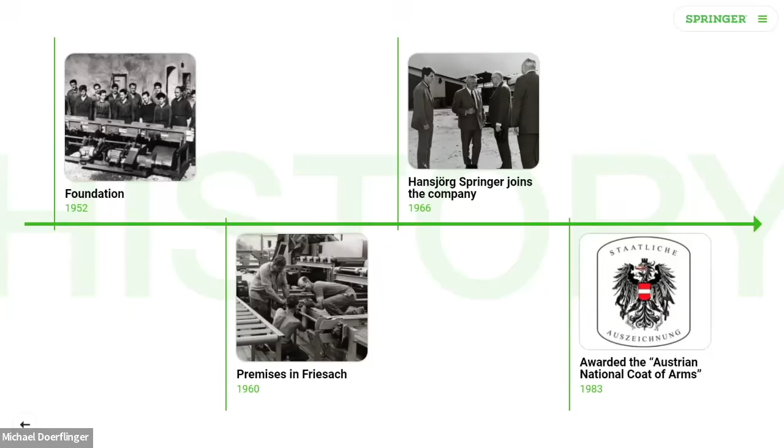So maybe a little bit about the history of Springer. The company was founded in 1952. Today, it's actively managed by the third generation of the Springer family, Gero and Timo Springer. Springer continues to evolve in the wood processing industry with innovative solutions. Springer entered the North American market in 2014 with a warehouse located in South Carolina and the sales and service office in British Columbia. Maybe, Sean, you can talk a little bit about the locations we have.

So the locations: Springer headquarters and primary manufacturing is located in Friesach in the southern part of Austria. The controls division is located in Linz and a satellite office in Klagenfurt. Springer is committed to developing their employees by offering internal apprenticeship programs in 7 different vocations. Students starting in grade 8 follow through to high school and into first-year university. Springer solutions have circled the globe and have been delivered to 6 continents with more than 30 installations in North America.

A few words on why customers have chosen Springer. Springer focuses on high quality and reliability. And it's very important for us to provide customized solutions to our customers. Our innovations help our customers to maximize productivity and performance. Our commitment to deliver the right solution for our customers includes research and development, engineering, installation, and continuous service. Springer's planet-friendly mindset guides us in utilizing energy-efficient and environmentally responsible solutions.

Springer's capacity begins with the 40-acre site in Friesach, including engineering facilities, manufacturing and machining, a paint shop, a warehouse and storage, as well as final packaging and logistics. Nearby, a second facility houses our service department and equipment testing.

Let's move on to the solutions and to the Springer portfolio. As you can see here on the screen, Springer provides equipment for log handling. On the very left side on the screen, you can see conveyors. We provide equipment for lumber handling. We provide equipment for automatic wrapping systems, wrapping lumber packages, as well as controls for the systems, including robotic automations.

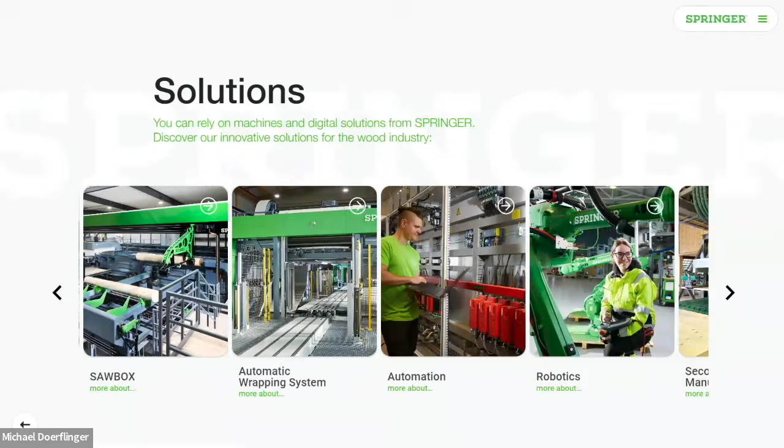Michael, I'm going to begin with talking about screws. The screw technology debuted in North America in 2016. It is widely recognized by the industry as being first developed by Springer, providing full electric control and efficient movement of logs. The screw unscrambles, aligns, and conveys logs with minimal energy consumption and maximum control and productivity.

The sequencing and conveying is done seamlessly with minimal fiber damage and equipment wear. The screw feeders initiate log movement in the direction of the receiving conveyor, minimizing gap and log impact. I was the mill manager for Coastland in 2017 when we installed the Springer merchandising line, and the screw technology was a determining factor. Thank you, Sean. In addition, one point worth mentioning, we installed about 60 units now in North America. 60 units. All right.

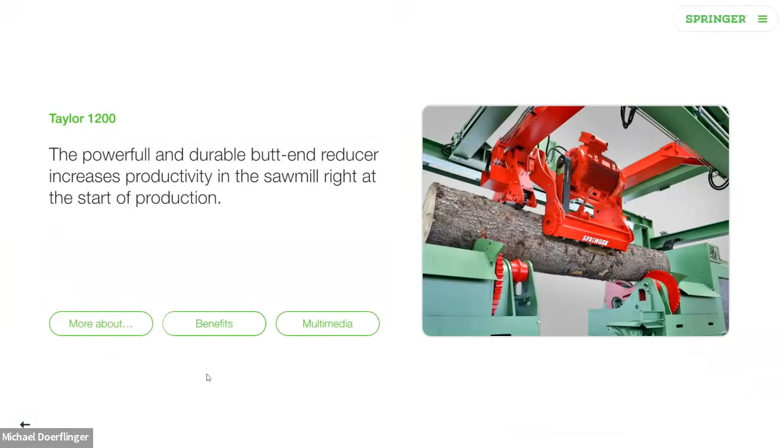The next component we would like to talk about is our Taylor 1200. It's a flare reducer. Springer provides flare reducers with a single and a dual head design. The cycle time for the reduction of the flare, and this is quite amazing, is 5 seconds. And the whole process can be done inline or offline on a bypass section to maximize production and the log flow. Springer's experience using the flare reducer provides a seamless flow downstream.

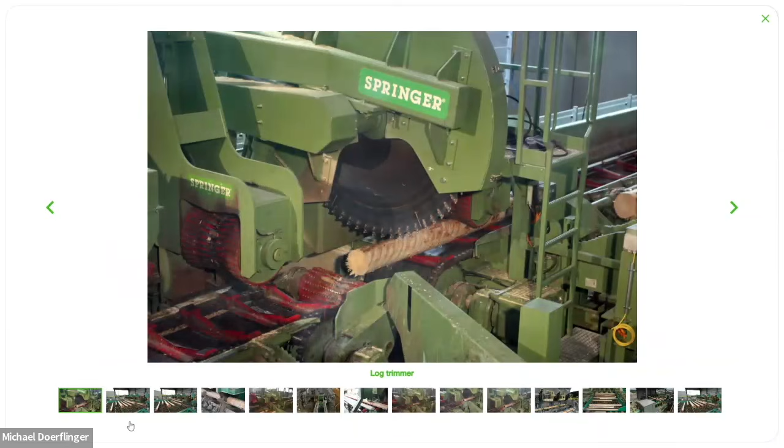Let's talk a little bit about the bucking. Springer offers different kinds of solutions for cutting stems, 2 solutions, in fact. We provide, as you can see here on the screen, the stationary system on the longitudinal section, or, as you can see now on the screen, a bucking unit with shifting saws on the transverse sections. Maybe, Sean, you can talk a little bit more about the entire merchandisers.

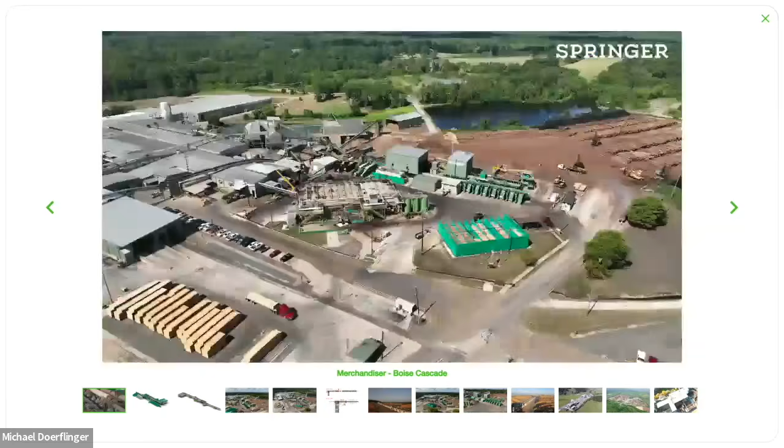Yeah. So the entire merchandiser lines would include log in-feed sections, debarking, scanning, optimized bucking solutions, trimming, and multi-bin sorting. The whole system is designed, engineered, manufactured, installed, and commissioned by Springer. Michael, how many bins maximum has Springer installed on a sort operation? We have like 200 bins. So 200 bins, amazing.

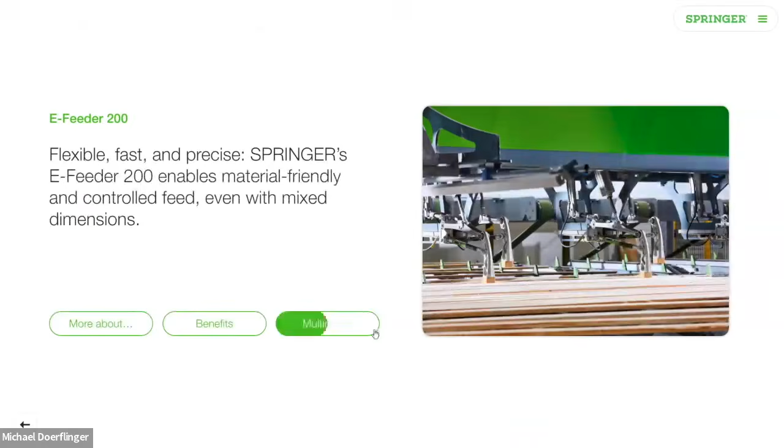So let's switch to the lumber section. I get to talk about this one. Yes. The E-feeder. This is everyone's favorite to watch. The E-feeder singulates multi-dimensional lumber to lug chain, feeding the grading lines, including timber dimensions up to 6 by 6. For processing timber, 2 arms in tandem are used to handle the heavier material for the larger 6x6. The E-feeder has been named the Crazy Horse and has proven to be a very reliable, material-friendly, and remarkably low-maintenance unit. It can be positioned or exchanged in existing lumber grading lines.

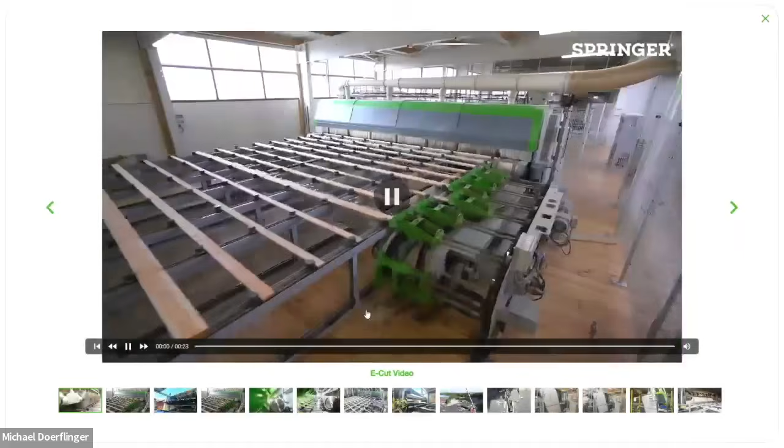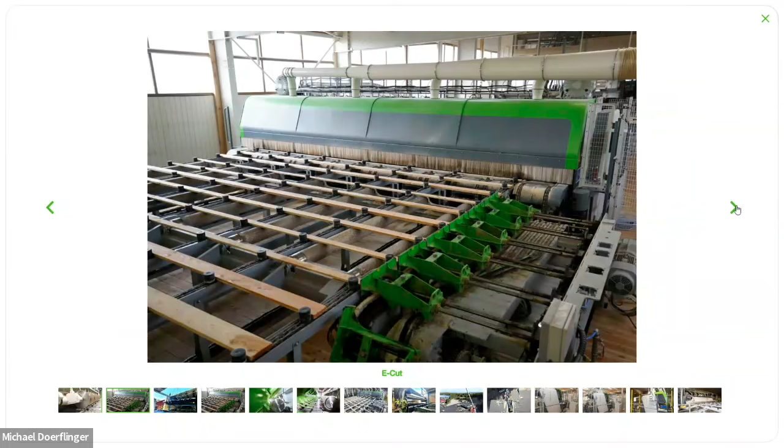Thank you. Another component we are very proud of, we call it the E-cut. E stands for electric, so we are not using any hydraulics or pneumatics on this unit. This unit is used for grading lines, just before the sorter. Springer's beltless trimmer precisely cuts up to 200 boards per minute with low power consumption. It works regardless of temperature and is a low cost and trouble-free machine due to the controlled movement of boards and trim ends. Again, this unit can be positioned or exchanged in existing lumber grading lines.

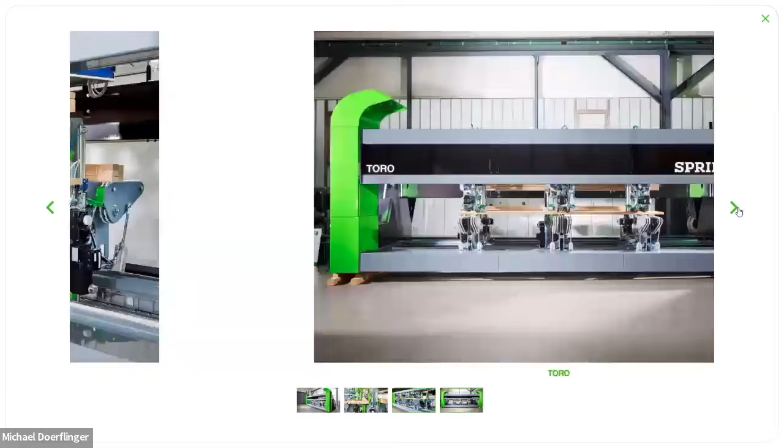And now we'll move into the Toro. The Toro is one of Springer's unique lumber bundling solutions, capable of bundling 15 packages per minute. It handles a wide range of dimensions and offers adaptable strapping positions. It was originally designed for small finished lumber bundles delivered to home centers for merchandising to retail customers. The machine is operator controlled to customize bundle sizes at will. The Toro is an example of Springer listening to its customers' needs and building an elegant and practical solution. The Toro can be positioned into existing stacking lines and can be toggled on and off. Springer also offers entire grading lines.

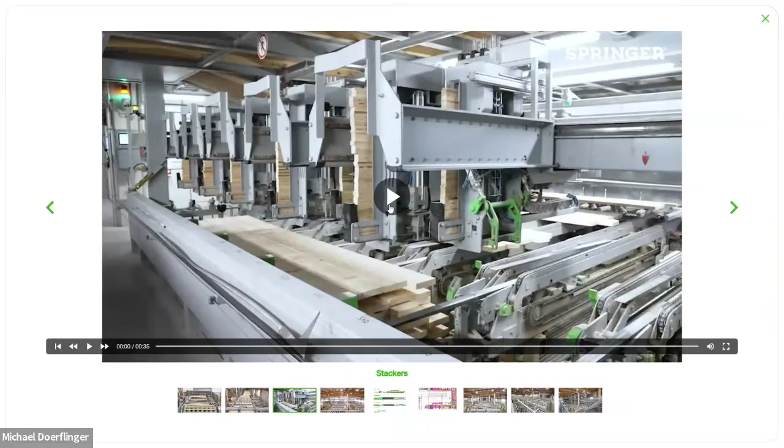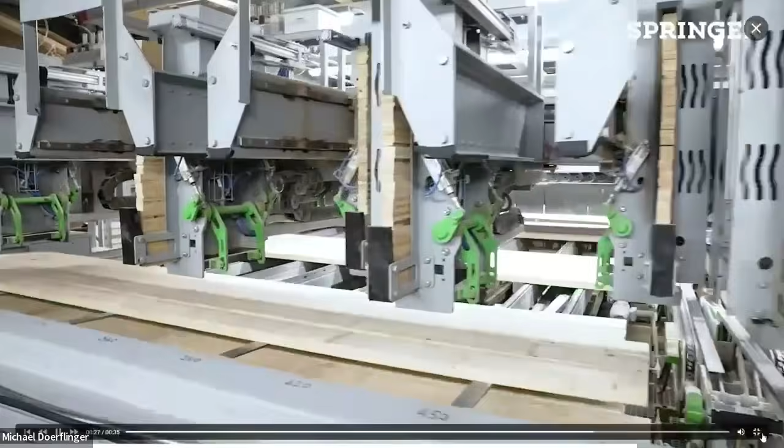Now we would like to show you a short video of a Springer high-speed stacking solution on the dry end. For this, we are using a double fork system with semi-automatic, movable lath or stick dispensers. This system is able to stack up to 28 layers or tiers per minute, so it's a high-speed solution. That is remarkable. Oh, yeah. Let's continue on the lumber handling side. That's going to be the last unit we are talking about for lumber handling.

It's the wrapper ED3000, we call it, and we are very proud of this unit. We have been installing this one a few times now, also in North America. The ED3000 wrapper's innovative concept enables efficient and automatic wrapping of finished lumber packages. And the benefits are outstanding.

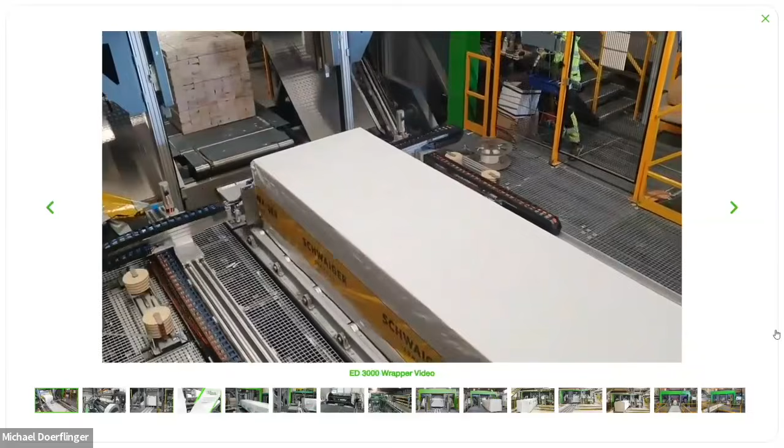A fully automatic film magazine dispenses for 6 rows on top of the machine. It's continuous production, not interrupted by the wrapping process. The unit creates a bag, custom adapted to the package sizes. Another benefit is both welding and sewing heads are available depending on film type. So we are using a sewing head for woven material and a welding head for polyethylene material.

Maintenance on this unit is very minimal. The whole system can be fit easily into existing wrapping lines due to its small and short footprint. And as an add-on, as you can see now on the screen, we also provide a stapler unit to secure the bags to the lumber stack without strapping.

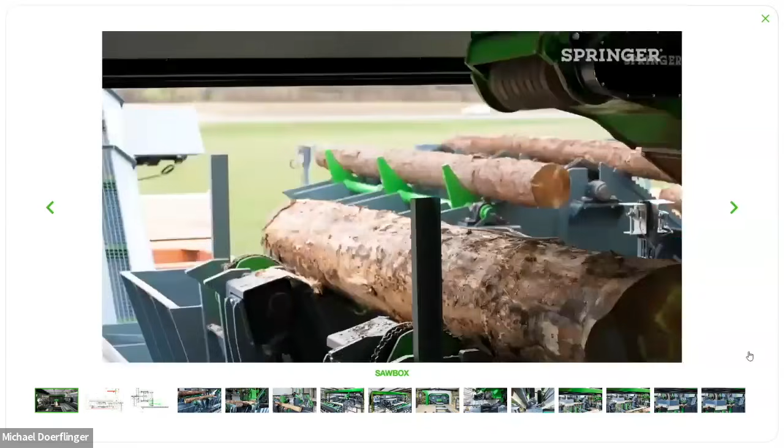All right, Michael. We're going to move into the feature product of today, and we're going to talk about the Sawbox. The Sawbox offers the possibility of operating compact sawmills with a very high degree of automation. The system debarks, reduces, measures, chips, and separates round timber. The resulting sawn timber is scanned, pre-sorted, and stacked using a semi-automatic stick laying system.

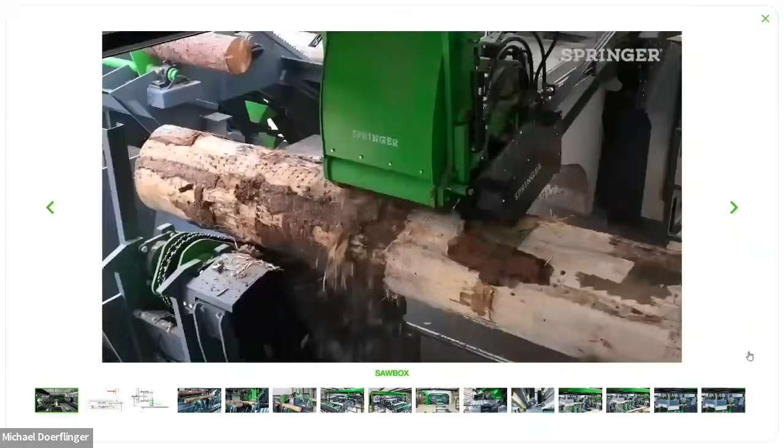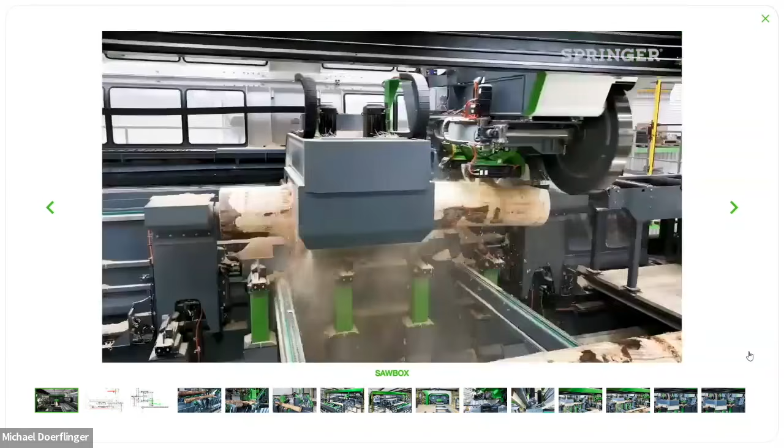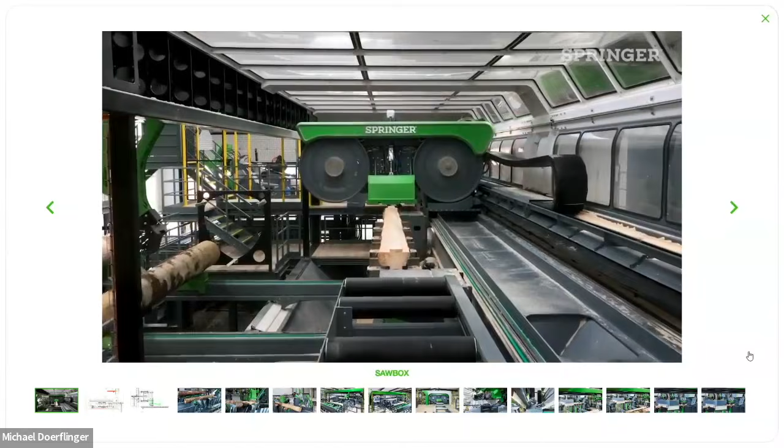The system offers small timber companies the opportunity to supply themselves with sawn timber, reducing the dependence on other suppliers. Within the last 2 years, Springer has designed, manufactured, and trialed the Sawbox in-house. After a test period of 2 months, we have now relocated the machine to our customer, Cimenti. Michael, do you want to discuss some of the benefits of the Sawbox?

Quite a few benefits. We would like to mention benefit number 1. It's the footprint. With the footprint ranging from 1,000 square meters to a maximum of 1,500 square meters, that's about 11,000 square feet to 16,000 square feet, the Sawbox enables optimal use of company premises. Another benefit is companies can cut their own round timber, thereby optimizing their production costs and not depending on their suppliers.

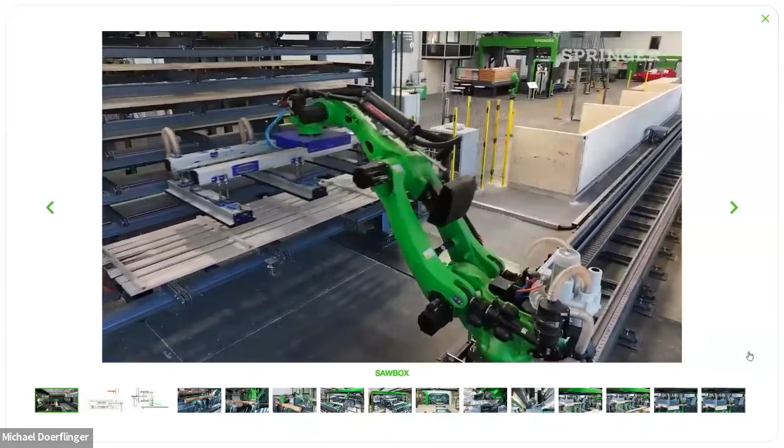Another benefit, the investment costs for setting up the Sawbox are only a fraction of those for conventional sawing technology. Investing in your own sawmill is affordable again. The use of local wood, and this is another benefit, and the recycling of all wood waste support the local economy and contribute to sustainability. In-house production enables stable product prices in the long term.

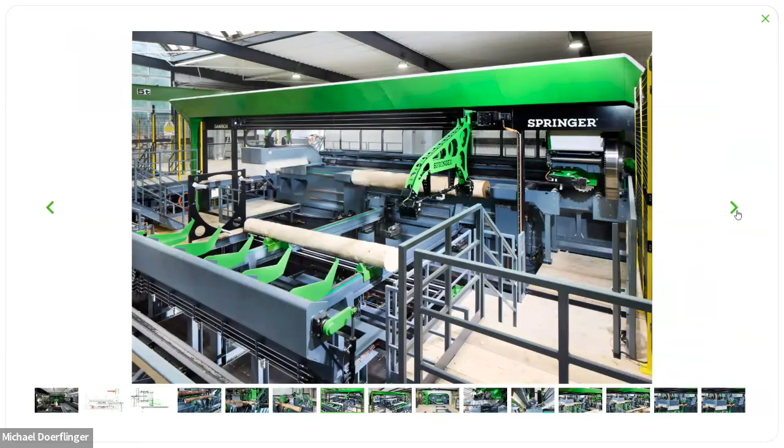The cutting capacity, we are calculating with roundwood coming in of 15,000 cubic meters up to 30,000 cubic meters. So 15,000 would be on one shift, 30,000 on 2 shifts. In board feet, it is like 6.5 to 13 million board feet. The log diameters we can handle range from 10 inches up to 40 inches. So we can handle quite huge diameters with this machine. The lengths, we can handle 10 foot up to 20 foot.

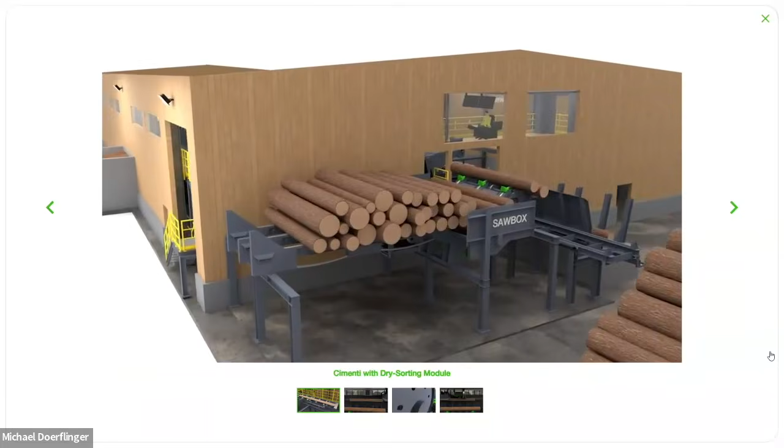All in all, the electricity consumption will be a maximum of 500 kilowatt hours. Right. John. Okay, Michael, thank you. Let's now look at the processes with a simulation video of the Cimenti site. So this is a computer-generated, complete modeling of the site. This video will give a complete overview of the equipment, as we will be showing you live in a moment.

So the material flow, right now you can see the in-feed, starts at the log in-feed. From there, a mobile shuttle transports the unsorted 2 to 6 meter long logs to a debarker, which also serves as a reducer in case you have flares on it. Next, that's what you see right now, is a cross-cut saw. It makes a clean cut on both ends of the logs.

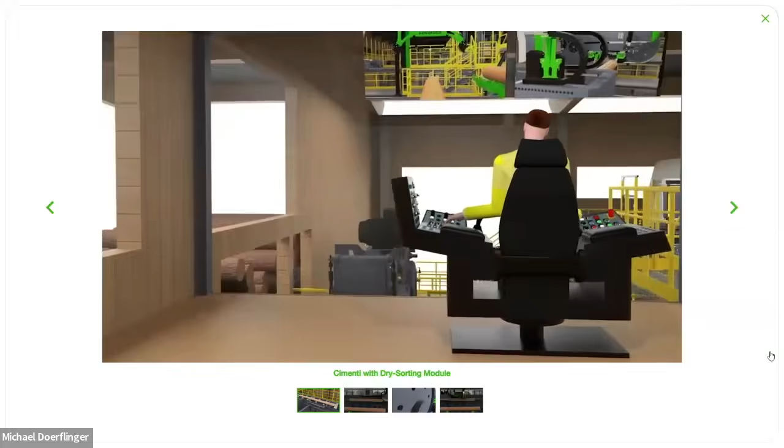After that, the logs are transferred to a cross conveyor and measured using a 3D log scanner. Based on the data obtained, the software generates the optimal cutting pattern. The actual cutting is carried out by a processing unit also developed by Springer.

So Michael, we're now watching the transfer, the shuttle, and beginning to see where the handoff takes place into the cross conveyor. You can see the log sitting in the loader arms, waiting for the conveyor to be ready, going to the measuring device.

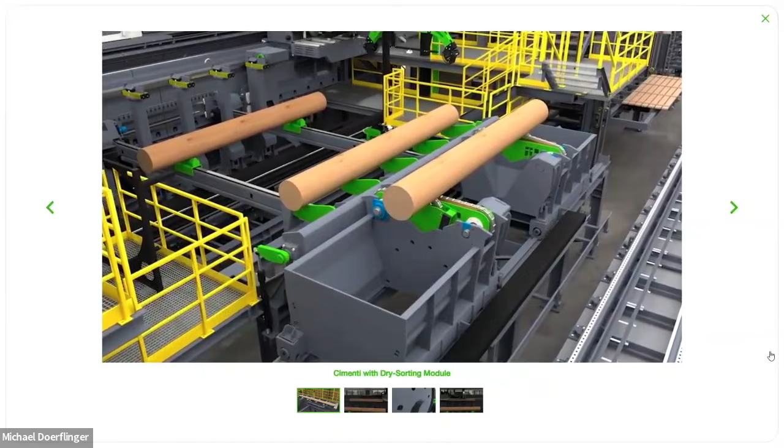Maybe a few words about the shuttle itself, and we are going to explain later on when we are there on site. You can notice the double chain, and it allows the block to be actually put into a reject bin should the operator determine that it needs to get ejected. Exactly. Those chains in the shuttle, they also help to rotate the log during the debarking process.

So you can see the pass off to the cross conveyor. The block is, again, like Michael said earlier, being scanned to determine the optimum cutting pattern. And again, we're going to show you the actual configuration here with some recorded video of blocks at the saw site.

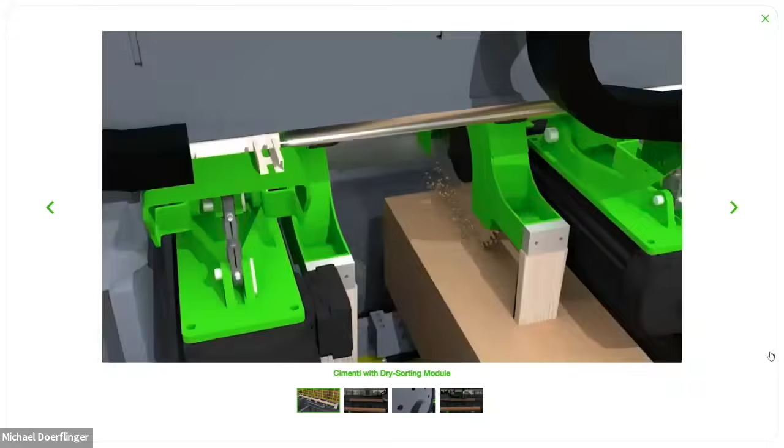So the processing head unit moves over the clamped logs and produces sharp-edged lumber in a single pass. The system is equipped with a profiling unit, 2 vertical circular saws for crosscuts, and a bandsaw. The finished lumber is pushed off longitudinally and transported to a sorting tower via a cross conveyor.

So you can see now the sawn lumber being pushed. And then roller conveyor. Yep, driven roller conveyor, and then it gets fed onto the cross conveyor, separating each board. They are now going to be positioned into the stacking system.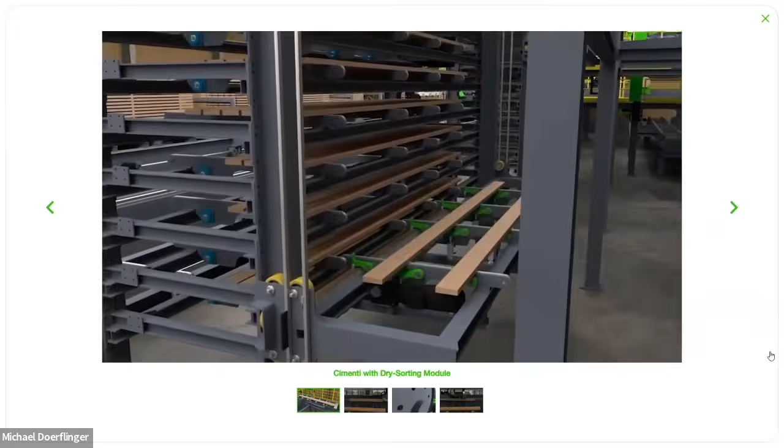The tray loader automatically loads by grade each of the levels. A robot then will unload using the tray and place it into the grade bin up and down the track. In Cimenti, they actually have both a green and a dry sorting line. That's right, yeah.

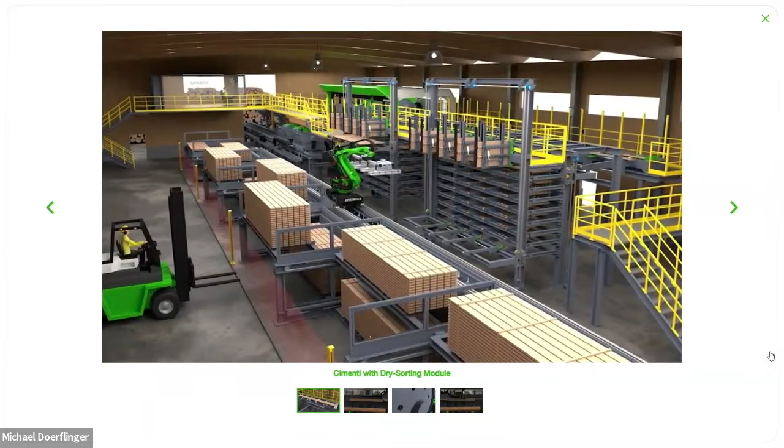Again, logs with diameters from 10 to 40 inches can be processed, so 25 centimeters to 1 meter. The Sawbox demonstrates its advantages, especially when it comes to larger diameters. The larger the diameter, the higher the output. The system installed at Cimenti is designed for logs with an average diameter of 35 centimeters, so this is about 14 inches, and an annual output of 15,000 cubic meters. So that will be about 6.5 million board feet.

The Sawbox concept is modular by design, with the lumber sorting being potentially shared by a secondary processing unit. Again, the Sawbox requires only, and this is the amazing fact, only 1,000 to 1,500 square meters of space, so much less than any conventional saw line. Okay, Michael.

Well, we're gonna change this to a little bit of live action so you can do a walkthrough. Yeah. And I'm gonna stay here with Jakob, and I will comment on the videos of the processes you're going to describe to us.

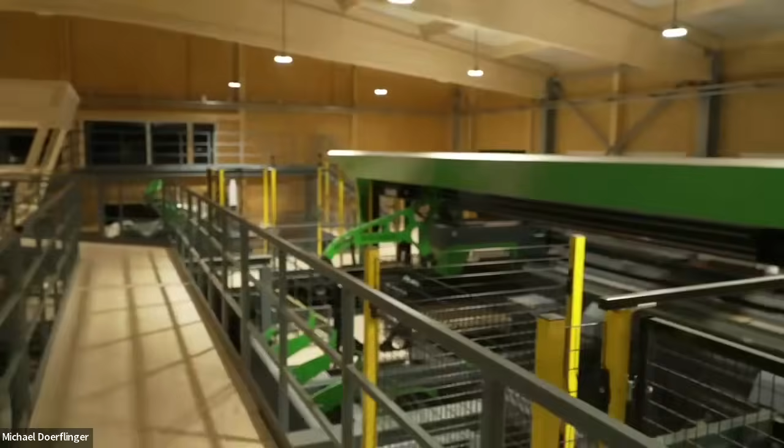So let's have a look at the feed section of the whole unit of the Sawbox. And maybe you can have a peek here at the back where you see the operator cabin. In this case, everything made out of CLT. This is the walkway going down actually to the Sawbox unit itself. You see it here on the left side. We will just have a walk around the Sawbox. The infeed system is right over there. Let's go.

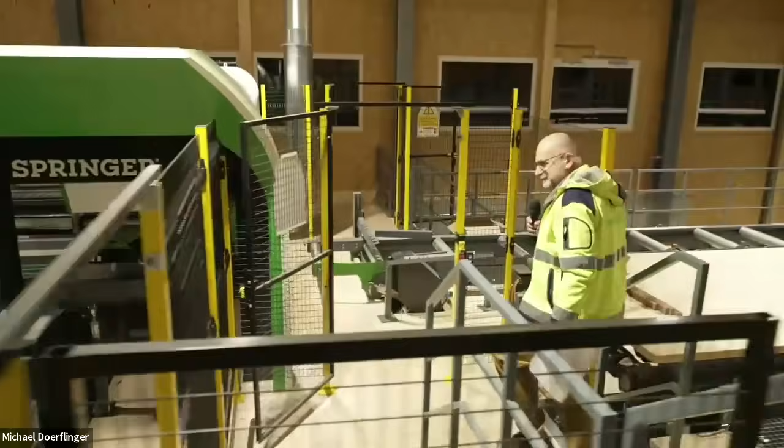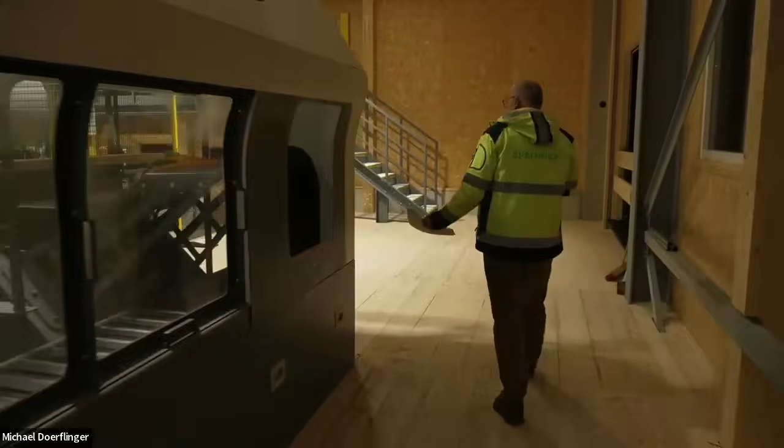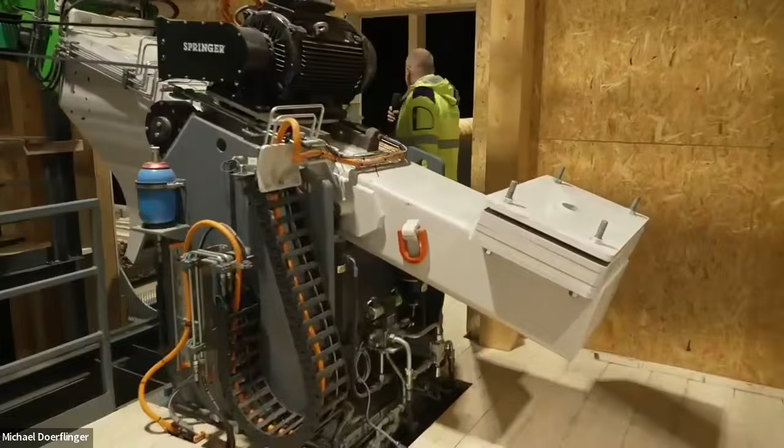This whole part is the back of the Sawbox. We are going around the Sawbox. Later on, we will come back here. And we are going down to the infeed section, passing the cutting device and the debarker. As you can see, it's already nighttime here in Austria.

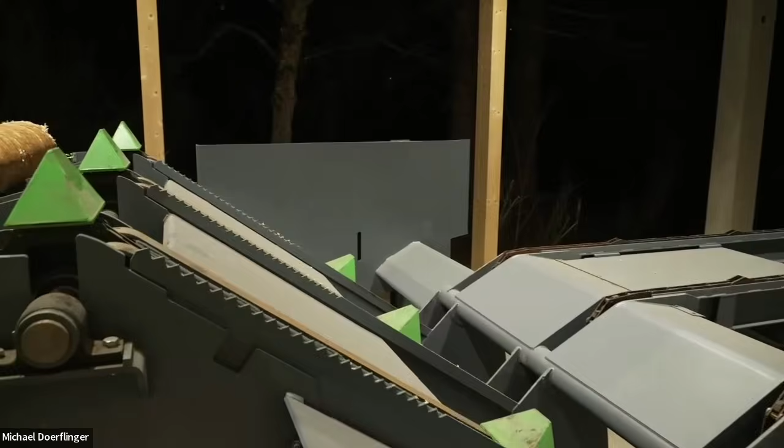Let's start here on the infeed conveyor. This conveyor is about 9 meters long. And in this case, it's for a log length from 3 to 5 meters, but we can anytime add chains for longer logs. Second unit is a simple jack ladder to unscramble the pile of logs. And here on my left is a stop end loader. And this stop end loader is feeding the logs into the shuttle.

What you also see here, right at the position of the stop end loader, is a measuring device. So it's a laser scanner. In this position of the stop end loader, we are already checking the length of the logs being transferred to the shuttle. This is necessary for the cutting later on. And then, Jakob, if you go ahead with the video, please show the video of the infeed section.

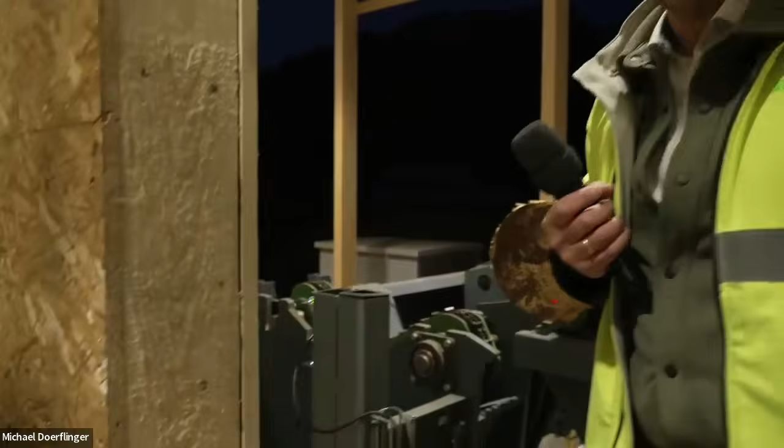Testing all of the equipment. You'll see the shuttle backing up to receive a log. Again, note on the infeed, this is from mixed wood. So albeit they look like they're similar sized, it can be a mixed diameter of logs.

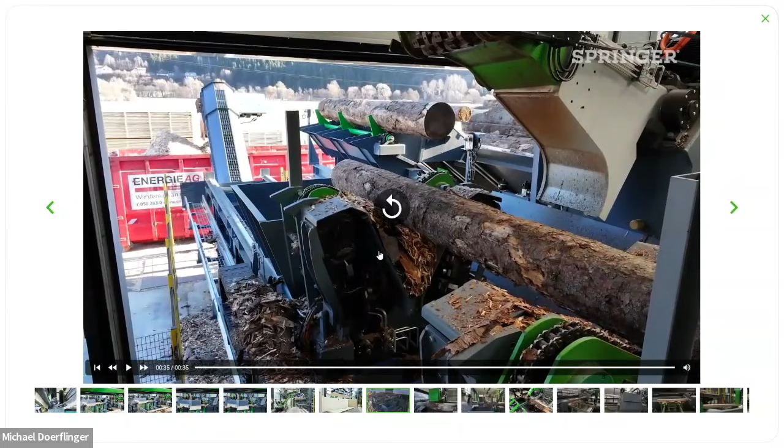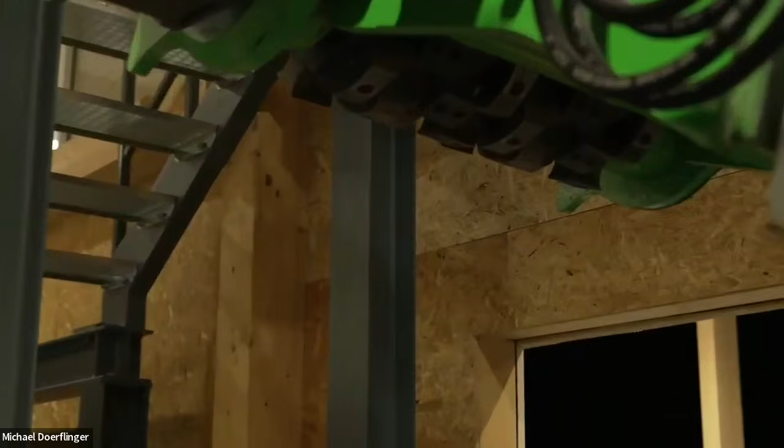Let's move on to the first unit after the infeed section. So right now I'm at the back of the debarker. At the back you can see the counterweight. In front we have a driven razor head. The length of this razor head is 24 inches. And again, you can use this unit for debarking the logs, or if there is a flare end detected, you can also use it as a flare end reducer, which is quite necessary for the process later on.

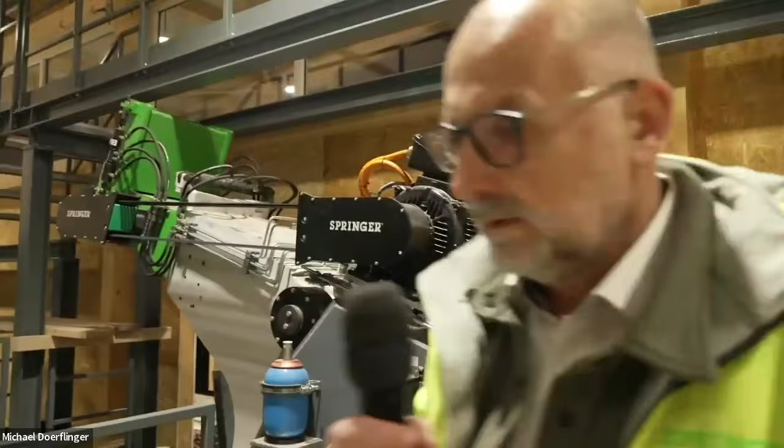On the left side of the debarker, you can see our cutting device. This is a unit for cutting precise length of the logs. So overlengths will be handled here. Please go ahead with the video.

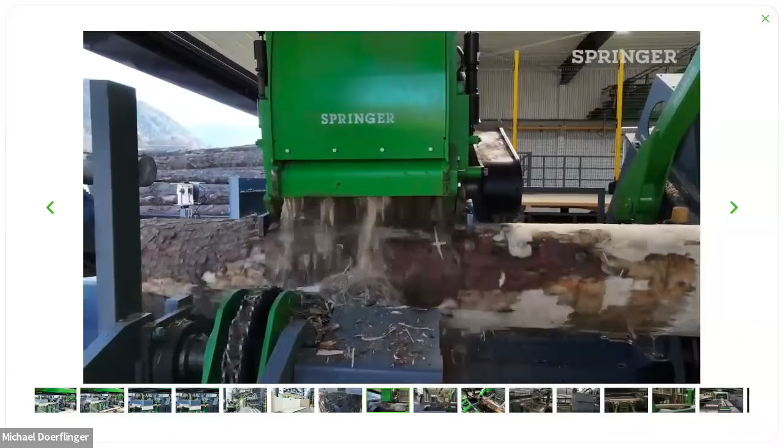As Michael described, the debarker removes bark that gets deposited into the waste conveyor below. This is just pressure fed with the razor head. The razor head is 24 inches in width, and it takes only minutes. Again, the operator can override should they see that the flare needs to be reduced, and it's under their control. The block advances, so both the leading edge and the trailing edge of the block are trimmed for cleanup and length.

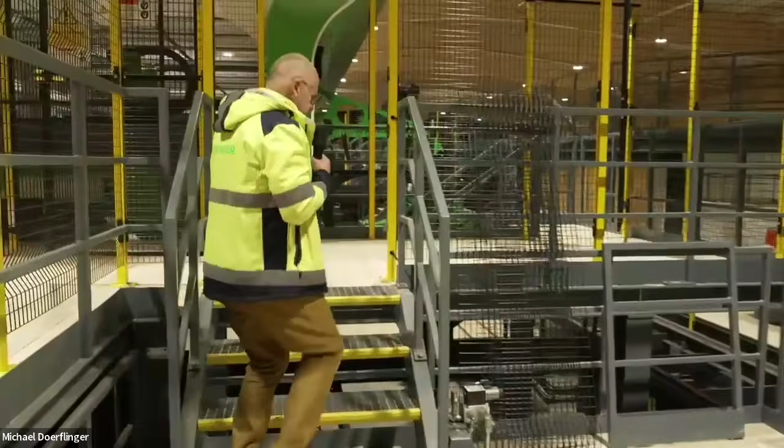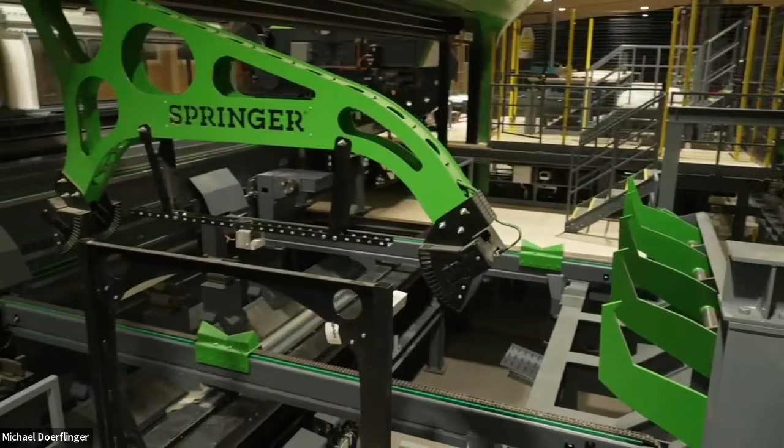So from here, we walk straight up to the infeed section, going to the Sawbox. So this is the rail from the infeed up to the transverse area where the logs are being transferred into the conveyor, leading to the scanning. We have included a scanning device with two scanner heads on top and one scanner head at the bottom. And maybe you can run the video, please, of this section.

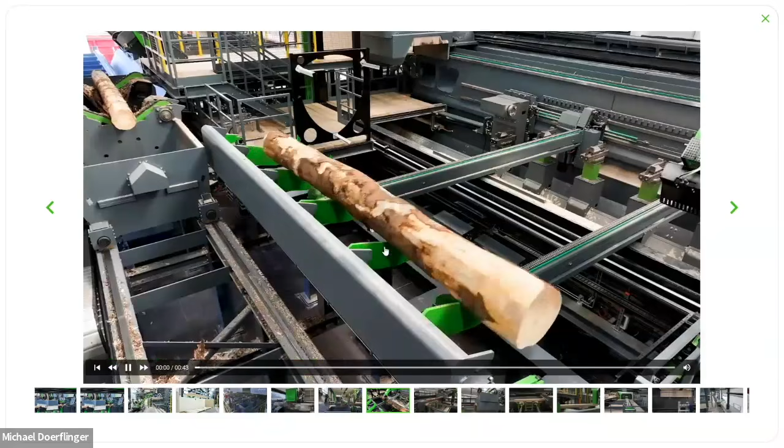So you're seeing the log passed off to the cross conveyor, being positioned for the 3D scan. The cross conveyor chains do an X alignment when it gets passed off to the spindles. The spindles themselves, from a height variation, will make that adjustment for the Y direction. So again, the scanning process is relatively quick. And you can see in the video that another block just got dropped off by the shuttle.

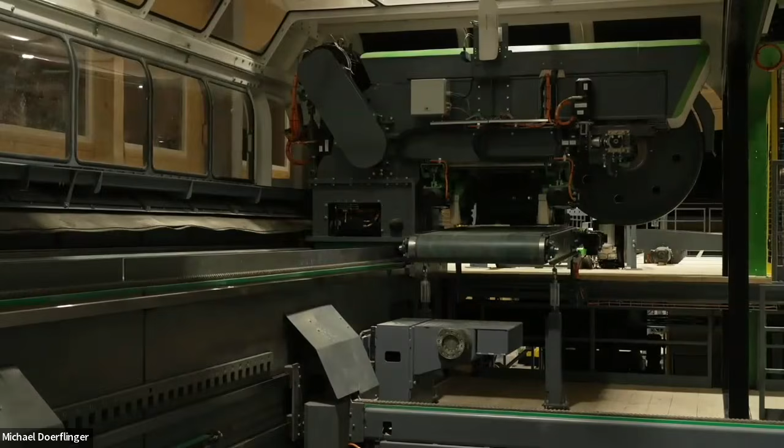Okay, from this area of the scanning, we go straight into the area where we do the cutting itself. You see on your screen now all the waste handling underneath. So there's a belt conveyor, actually two belt conveyors. And you also see those spindles, one on the left, one on the far end. They are going to hold the logs, they're going to clamp the log.

But first, actually, I would like to show you what is underneath this cabinet here. This cabinet contains the chipper heads. And those chipper heads are making the clean face on top of the cant and also the profile of the logs. But I think, Christian, we go with the camera straight back to the backside of the Sawbox, to the other side of the area where we have the bandsaw itself and the rib saws.

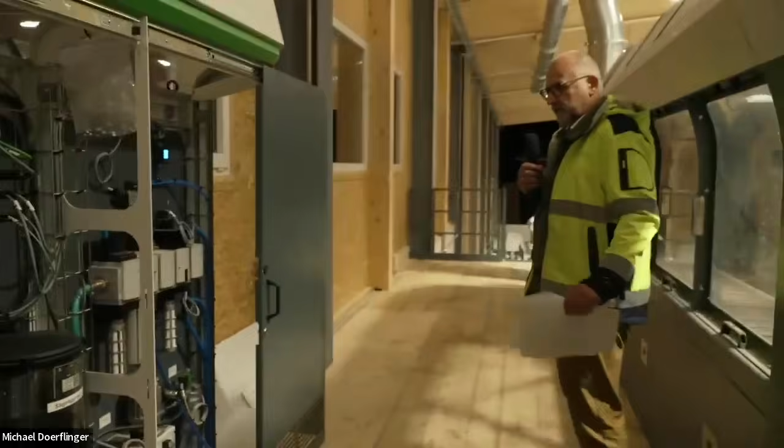Maybe a quick glimpse to this area here. We have installed the grease system, so the whole system is equipped with the automatic grease system. Also, the pneumatic control system is located here at the back of the Sawbox. Let's continue on to the other side of the Sawbox, where the bandsaw and the rib saw carriage is mounted.

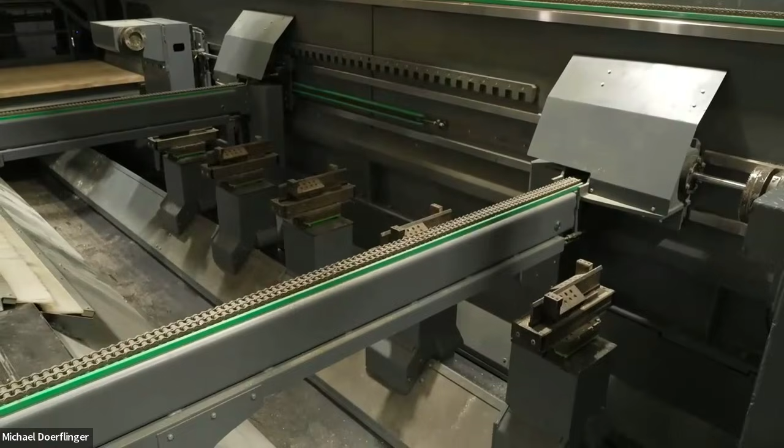Again, we need to go down here. So we are just on the opposite side now. Over there is the carriage with the chipper heads. In the middle, you see the spindles. They are clamping the log. Just down there, you see 5 arms. They are all separately movable and adjustable, with a clamping device on top of those 5 supporting arms.

What you see here is the area where we are still going to install. Again, we are not finished with the installation. We are going to install the bandsaw itself here in this area on these drums.

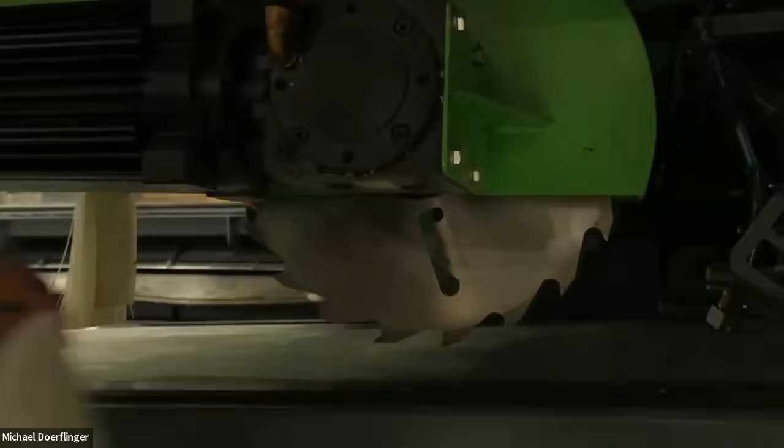In the middle, you see the rip saws. They are adjustable. We have a couple of them, so 2 of them. And the measuring is done also here on this device, on the carriage where we have mounted the rip saw and the bandsaw. The measuring is up here.

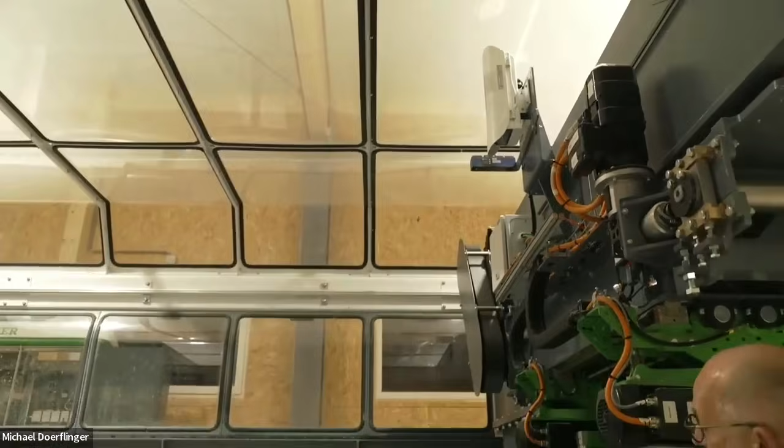You see a camera up there and the laser scanner. So with this camera, we are checking the quality of the logs. And with the laser head, we are checking the dimension. Let's go for the video.

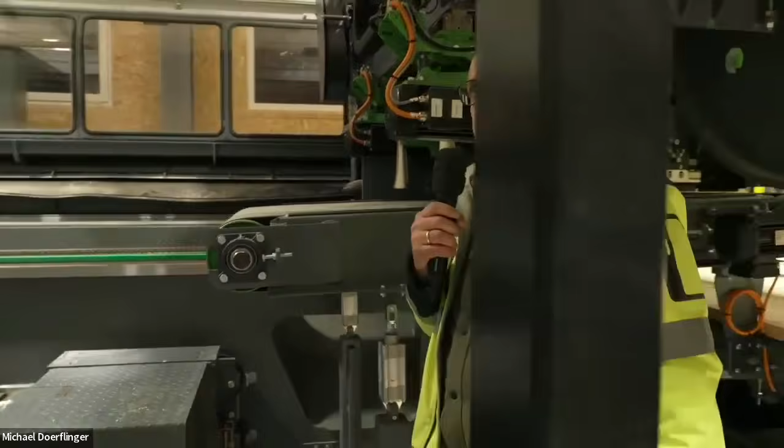In this video, the scanned log has been centered and is being picked up by the block spindles. It's going to do a rotation for the optimal cutting pattern. These supports from below come up, and the chipper carriage now profiles the top. So it does a single pass, cleans the top off. On its return, it will bring the bandsaw, in addition to chipping and profiling the first board.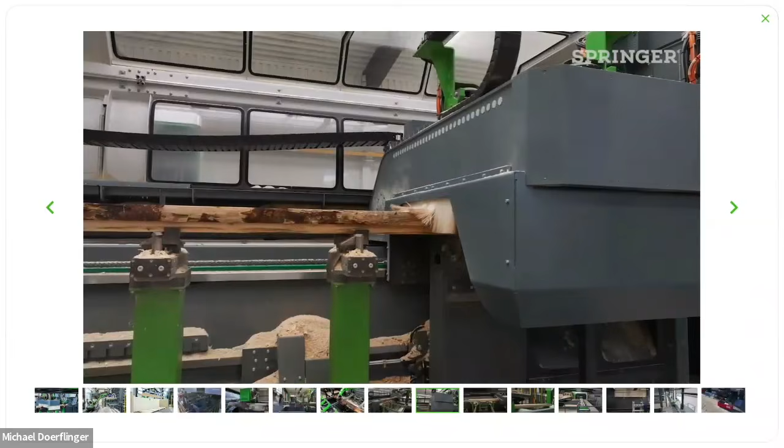The block will be turned. And the support pieces from below will clamp the board, which allows the spindles to then fall out of the line of the bandsaw. You will see this video now where we're nearing the end of the sawing of the block. The bandsaw is now pushing the timber off.

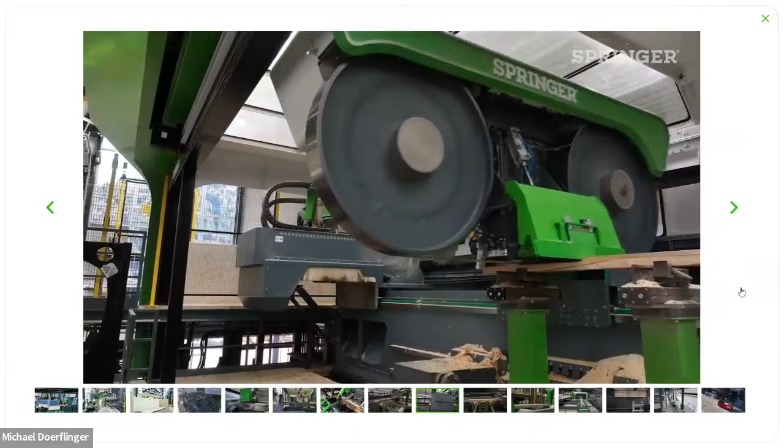The remaining section is profiled and will be cut again by the bandsaw. The remaining clamped portion, the minimum, is 1 inch. However, the sawn timbers can be as small as 10 millimeter. The chipping heads can cut to a maximum depth of 3.5 inches.

The maximum cutting speed is 180 feet per minute. The bandsaw is 7 inches in width with a kerf of 120 thou. The rip saw's kerf is 180 thou. The dual rip saws would enable as many as 3 boards to be cut simultaneously.

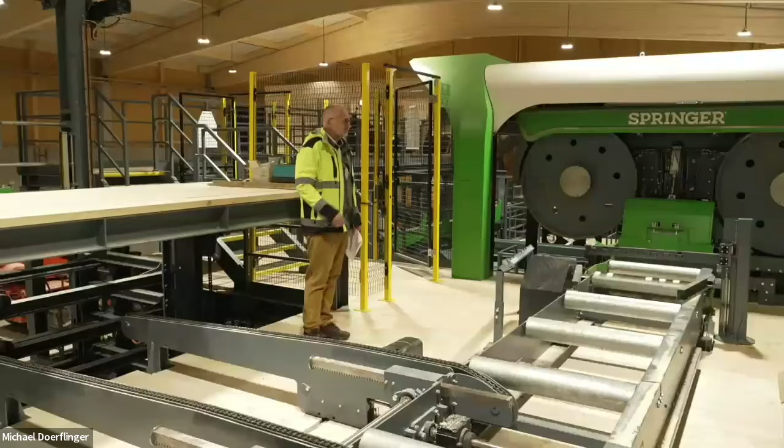So we are at the back of the Sawbox unit. This one is the pusher you have seen in the video. This is the unit pushing out the boards onto the longitudinal driven roller conveyor. One thing we would also like to mention is that in this area here, you can add a rip saw for ripping or splitting big timber also. This would maximize the output capacity.

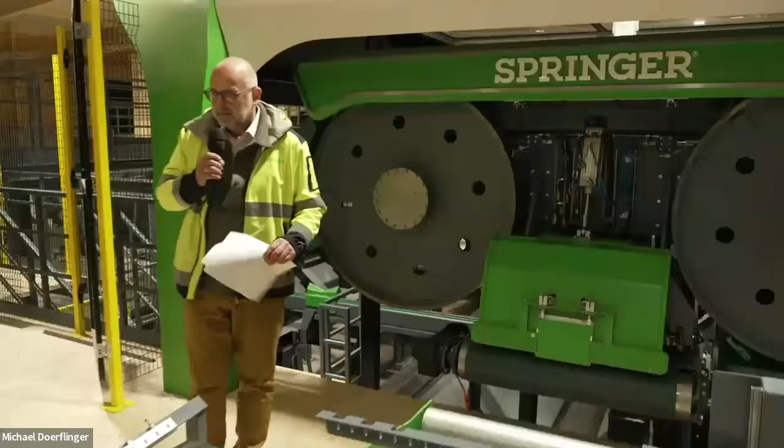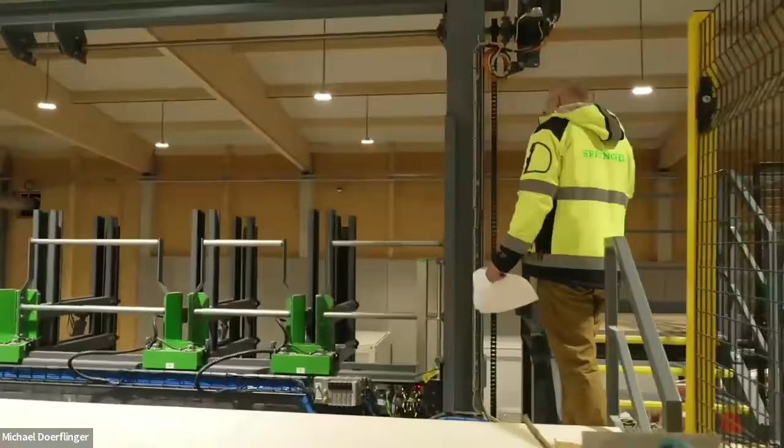So right now I'm standing on top of the sorting trays. What you see here on my left hand are the stick magazines. This is a semi-automatic system. So you can feed them manually from up here, and they are all adjustable. So whatever lengths you need to put sticks on, you can adjust it here with these magazines.

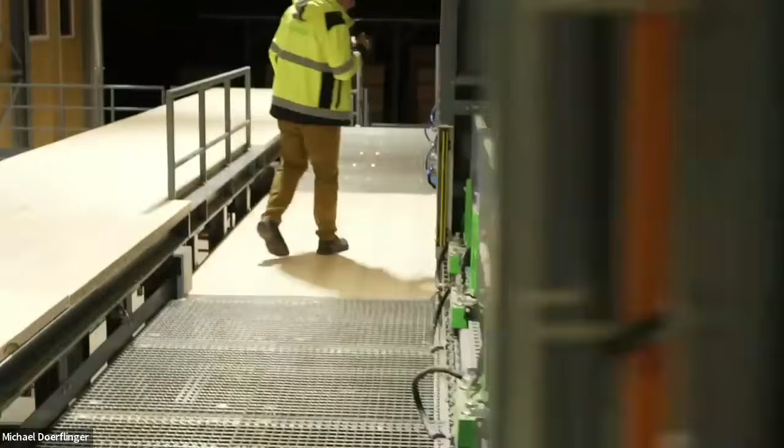And Christian, I think we just go down to the floor level, and let's have a look how we do the stick laying or the board sorting. So you can see here the long track with the robotic system. We use KUKA or also ABB with vacuum devices.

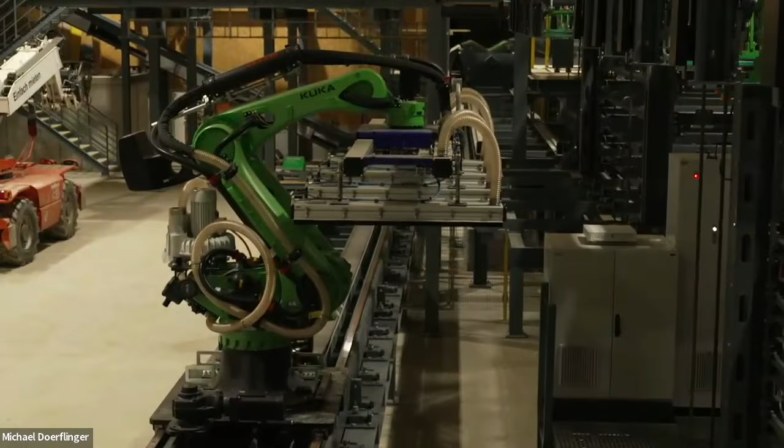And on the left side, not yet installed, is the area where the robotic system will stack the layers and make a package. Please go ahead with the video. So a loaded tray is pushed out into the tray unloader. It's receiving its sticks, and it will go back down and be presented to the stacking robot.

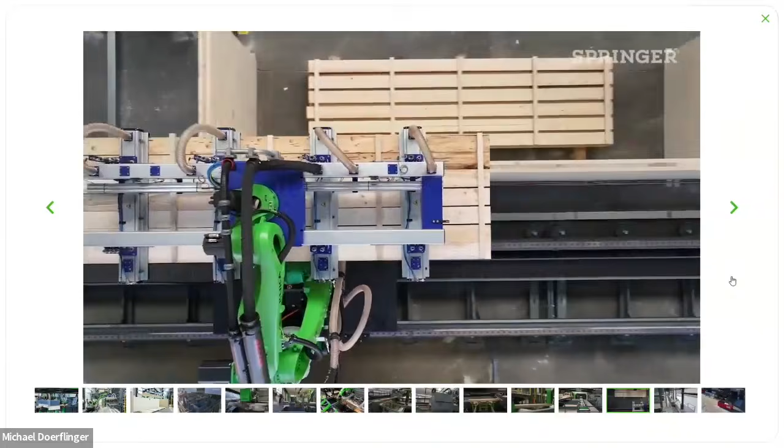The robot then moves into position, utilizing a suction on the tool arm. It lifts the sawn lumber and places it into the appropriate grade bin. These bins can be doubled up, creating multiple grade capacities for each unit. The robot will also be utilized in the dry sorting application.

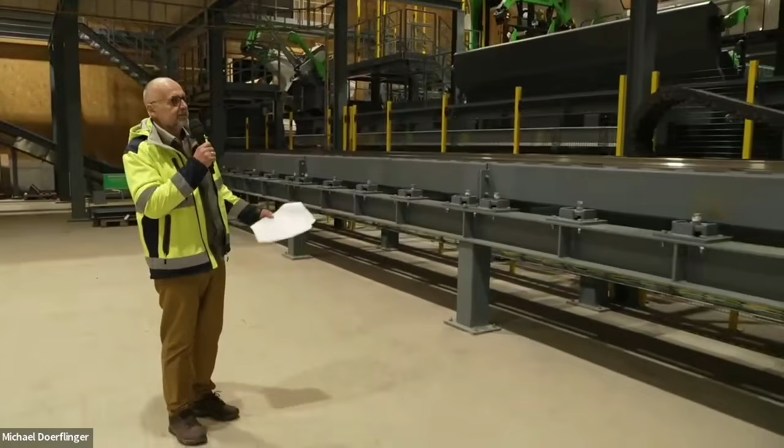So right now here, we are down at the lower floor level. Again, you can see the rail here where the robotic system is mounted. Attached to it is the vacuum system. And right now you have a better view of the stick laying system.

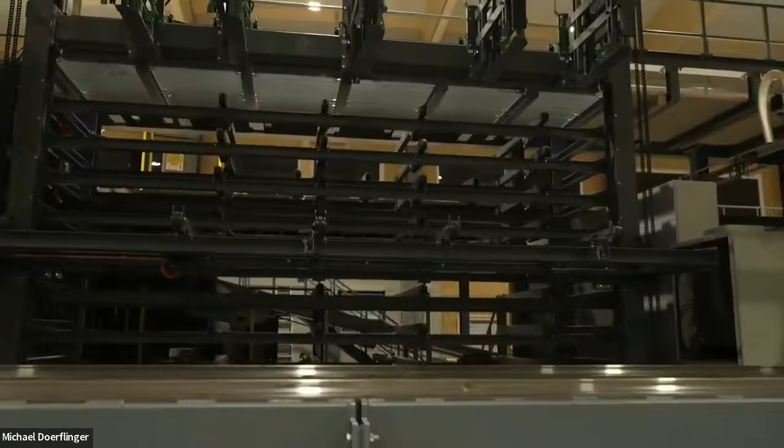So when the layers are coming out from the sorting system, from the sorting trays, they go onto this outfeed conveyor. The outfeed conveyor will lift the tier or the layer up to the magazine, and the magazine is automatically dispensing the sticks onto the tier.

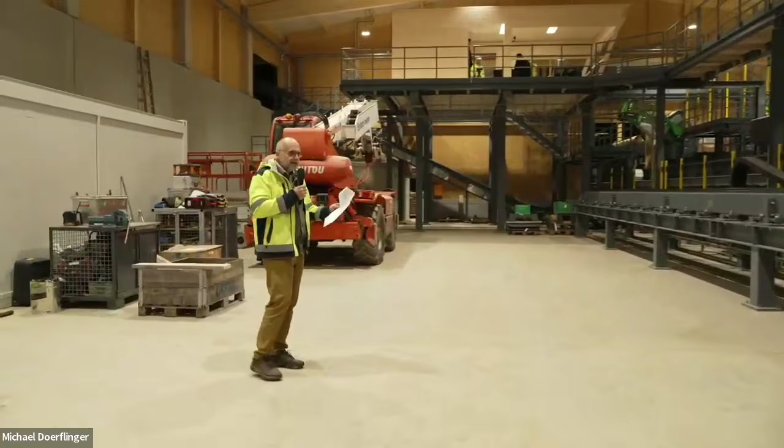And then the robotic system will pick up via the vacuum system the tier or the layer and bring it to the stack where it should be positioned, anywhere in this area. In a couple of weeks, we are going to install these bins here, and we will have the possibility to stack lumber onto 8 different bins. Okay.

All right, we're waiting for Michael to come back up to us. I have to say that this facility is remarkable. The wood construction, as a past operator, I would have thoroughly enjoyed having the space and the aesthetics that wood brings to an operation like this.

Michael, well done. Thank you. I think Catherine has been arranging some questions for us. Yeah. Hi, yes, a few questions came in here.

What is the yield of the Sawbox? Okay, well, based on the measurements and the stats that have been gathered from the trials at Springer, the big variable is the diameters and the log lengths, but 70% has been achieved in the outturn. We had an in-house test run of about 2 months, and the outcome was 70% yield, or 70 to 75.